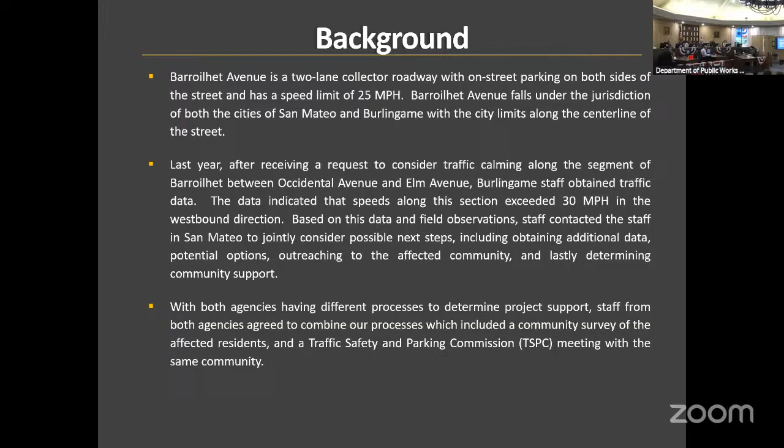And then moving along, this is El Camino Real on your right, and the border of Burlingame, San Mateo, and Hillsborough is Elm. So the section we're considering is the red section between Elm and Occidental. I'll talk a little bit more about this, why the section between Occidental and El Camino is highlighted, in the next slide.

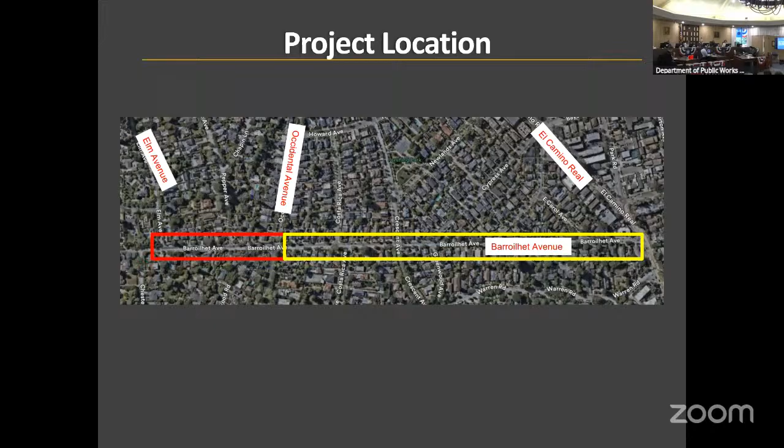Again, here's the section we are considering. Also last year, both staffs held a community meeting with the residents, and we noticed the residents on the section of Barroilhet between Elm and Occidental. However, also at that meeting were in attendance the folks east of Occidental, between Occidental and El Camino, who also showed up to that meeting. And they had expressed a desire to also have their roadway looked at for traffic calming, possibly speed cushions.

Staff at the meeting determined that speed cushions were the appropriate traffic calming element to install. We also looked at the other section of Barroilhet between Occidental and El Camino and collected data there. That data did not exceed the thresholds established by San Mateo.

So we decided to remove that section of Barroilhet between Occidental and El Camino from consideration at this time. The goal would be, if supported and we put in the speed cushions, to monitor that section of Barroilhet between Occidental and El Camino to see what happened. If speeds continue to decrease or stay the same, we're fine, but if there's an increase, we can reconsider it for speed cushions at a later time.

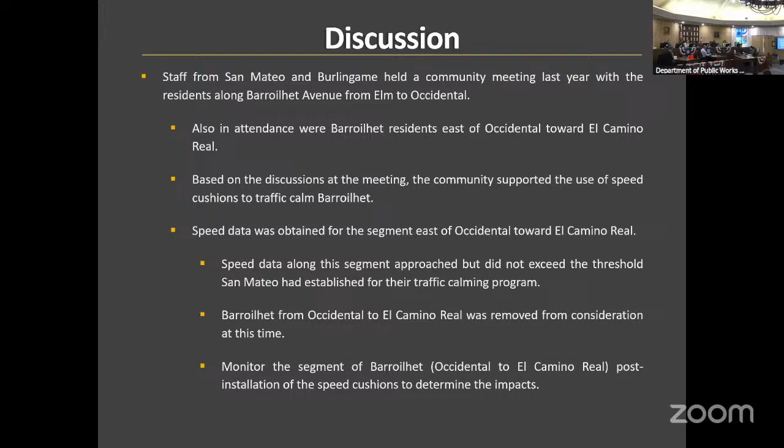Based on both the data we got and the feedback from that community meeting, San Mateo staff distributed a neighborhood survey for speed cushion installation. This survey would help us determine support for the speed cushions, outline the process used to determine whether they were supported, and let folks know the speed cushions would be located with an engineering study.

Moving on to the survey results, 17 out of 21 were returned. At least half, so 10, needed to be returned for the survey to be valid — we got 81%. For implementation, two-thirds of returned surveys needed to support it, and again we exceeded that with 82% of residents supporting it with yes.

So based on both the traffic data we acquired and the survey results, both agencies recommend we move forward with the installation of speed cushions along the section from Elm to Occidental, as well as do some post-monitoring once those speed cushions are in, to follow up and see if the other section may need improvements at a future point.

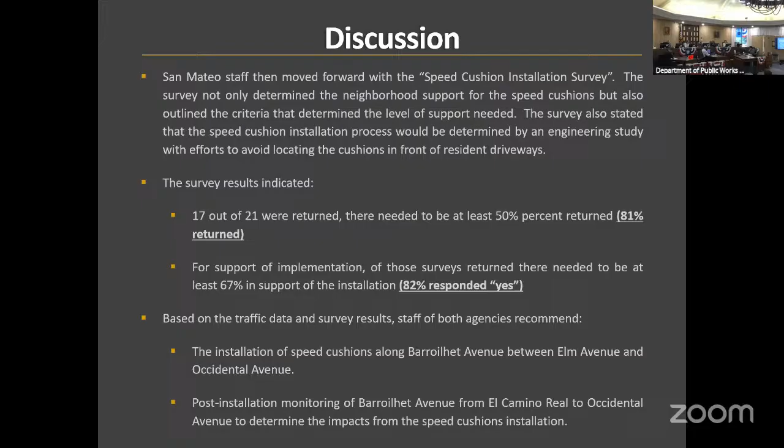So with that, I know we have some residents — hope to get your feedback as well as the community's feedback on this, and then get the support to move forward with the installation.

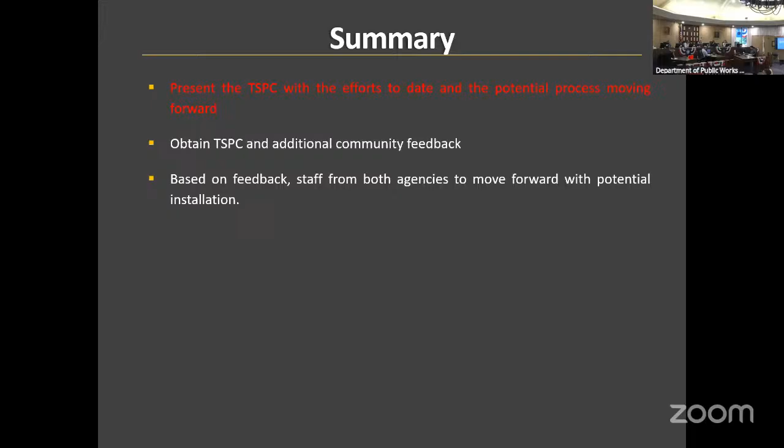So with that, I know we have folks from the Barroilhet who were part of the project, so they'd like to speak. All right, thank you, Mr. Wong.

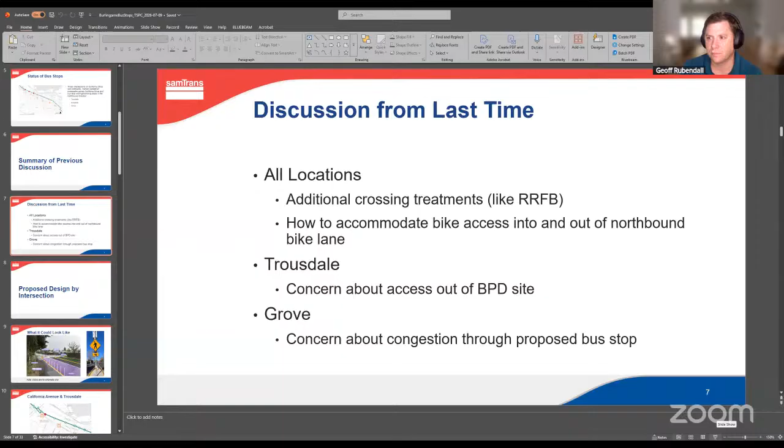Take us away. Great, I'm Nicholette Tolmie, I'm a senior planner at SamTrans, and I mostly work on bus stops. I unfortunately missed the meeting last month, but I'm here to present on our detour and bus stop designs and the changes that we've made since last month. We have a pretty quick agenda. I'll go very high level, mostly just a reminder of what we're here for and some background and context. And then Geoff will get into the details on how we responded to some of the comments from the last commission meeting.

So the purpose of tonight is we really want to get some final comments on the designs of these 3 intersections, and hopefully after this meeting have the consensus to start thinking more about implementation. We are getting as close to final in the designs as possible and would really like to hear any comments that are lingering in your minds, or if you're seeing anything, feel free to speak up about anything you might not feel super comfortable about, or anything that might come up in the future as a barrier when we're thinking about implementation.

Just a quick reminder of why we're doing this. The Caltrans project on El Camino Real is about 3 miles through the city of Burlingame. We think the construction timeline will be around 3 years. It's currently happening, and we are running this detour along San Mateo Drive and California Drive. The construction impacts the roadway all day long during weekdays. This is Samtrans's biggest and core route, ECR, which sees about 10,000 or more daily boardings. This provides a huge connection throughout the peninsula, so this is a really important project for us and all of our riders.

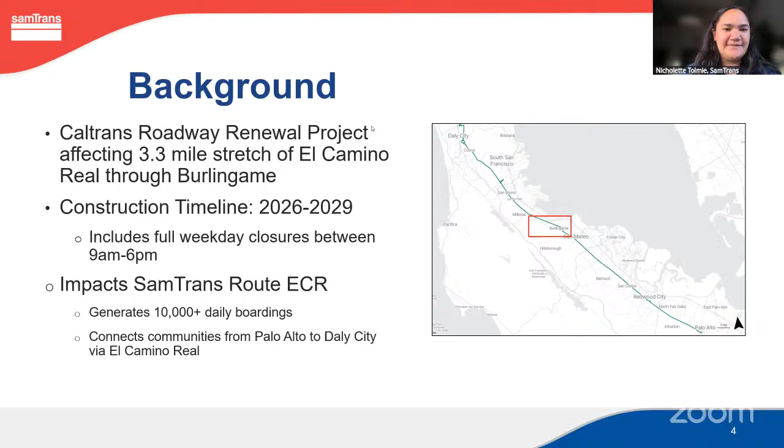Just a reminder of what we're speaking about specifically today. We have a bunch of bus stops that we're using in the detour, but there are 3 on the northern segment of California Drive that don't have an accessible sidewalk in the northbound direction. That's at California and Trousdale, Rosedale, and Grove. Geoff will get into the details of how we're designing around that issue.

The designs have been revised based on input we've received from you all, as well as additional assessments we've been doing and internal conversations with city staff and Samtrans. Just a quick summary of the high level feedback we heard was an encouragement or request to do additional crossing improvements, something like an RRFB or other crossing improvements, and to think through how bikes may or may not be able to access the northbound bike lane because of these new bus stops.

There's some concern about how and where cyclists would come into and out of that lane at these intersections. Specifically at Trousdale, there was concern about access to the police department site, as well as the left turn pocket that's there, and we're also talking about where the bus stops would be—they would both now be on the northern side of the intersection. Then at Grove, we discussed what an in-lane bus stop would do during congestion, and how that may cause issues or exacerbate the existing peak period congestion in the southbound direction. We talked about a bunch of other stuff too, which we can revisit as a group.

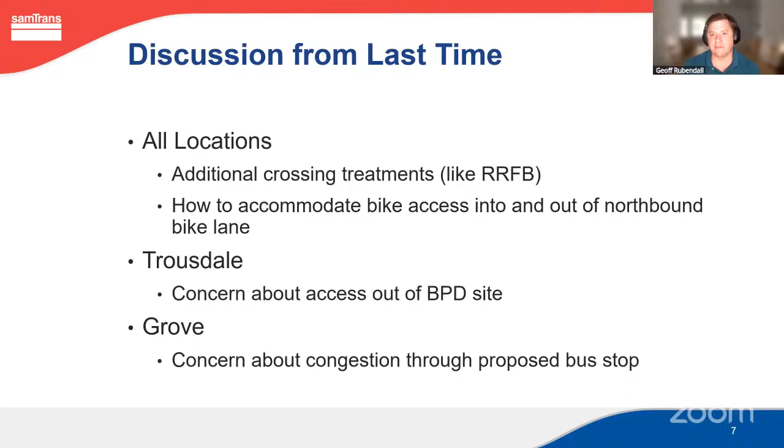We have similar slides from last time that walk through each location, but really wanted to start with the cartoon we showed last time that shows the rendering of where and how these bus stops could look, minus the purpleness—that's purely just to show the area where somebody would be waiting.

This is at Rosedale, a picture with a rendering of what that northern stop could look like. It has not been updated to include additional features such as the RRFB we're proposing at each location, shown on the right. This is an example from a different city, but it also includes a raised concrete median island in that installation, which we are also investigating and proposing here. It would not be exactly where the RRFB post would be, but before that, so it provides something in the buffer—a vertical element that someone riding their bike or driving their car would see and encounter before making contact with the post itself.

So the first location to revisit is Trousdale. This is a street view image of what's out there today. There's the existing left turn pocket that turns left onto Trousdale, and this raised triangular island. In the northbound direction, like Nicholette mentioned, there is no sidewalk, but there's a striped bike lane, as well as a striped bike lane in the southbound direction with green markings through the intersection.

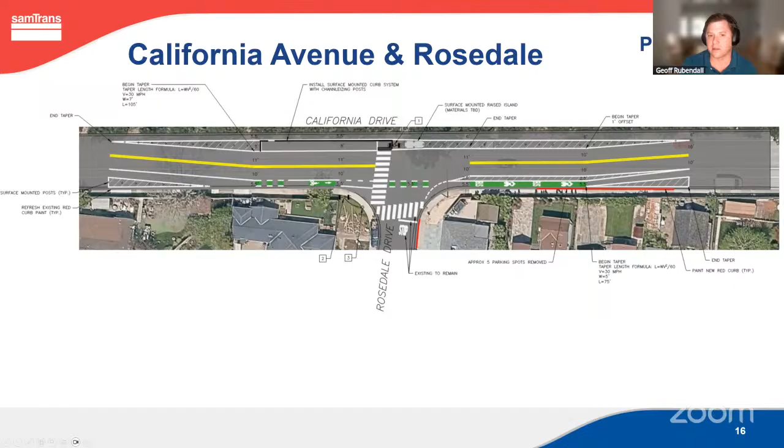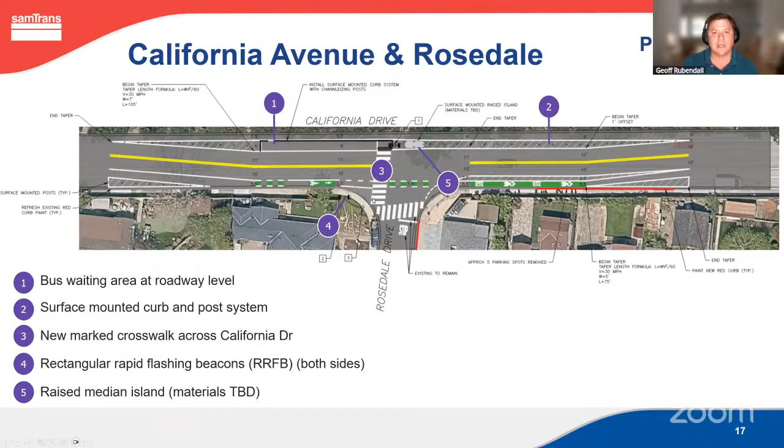These are again just highlighting some of those elements: the buffer area identified as number 2, the buffer island as well, and the crosswalks that we talked about last time.

Last one at Grove. This is where the bike facilities are no longer striped bike lanes, but shared lanes with sharrows in the roadway. I believe there are some green markings leading up to it, but not actually at the intersection.

So this is more of a constrained approach where we're retaining the southbound shared lane. We are able to stripe in a northbound 4 to 5 foot bike lane for the northbound direction. These would be in-lane stops again, and this one has a little bit more impact in terms of temporary parking loss while these stops are active.

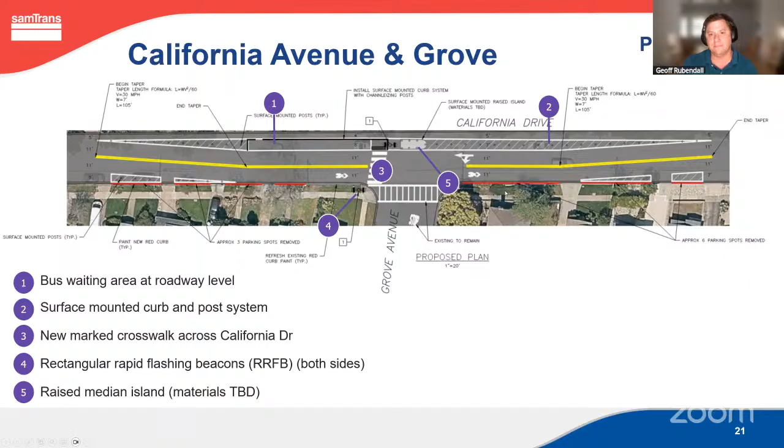But this also does include the RRFB and the buffer island that we mentioned as well. Okay, next slide—this is just identifying them again. So really that's a quick run through of the changes.

Happy to talk through any questions you all might have. We've had a conversation with Caltrans to discuss the logistics, some of the proposed materials, and configurations—still ongoing conversations. Got some children in the background, hopefully that's okay for you all. We're still hoping to have something installed by the end of summer, late summer, early fall.

One thing we didn't mention last time—except in discussion—is where there isn't a flat concrete or asphalt laydown area for people getting onto and off buses in the southbound direction, there will be some landscaping and modest paving or concrete work, so that when the bus picks up or drops off folks, people aren't standing in bushes or having to walk through bushes. There will be a flat, accessible area for folks getting onto and off the buses.

And with that, I'll pause and happy to answer any questions or clarify any points you all may have. All right, thank you very much, appreciate that. Commissioners, are there questions on this project?

Commissioner Israelit: I apologize, I missed last month's meeting, so this is the first time I'm seeing it, but if I can just step back one step.

So we are taking away parking for short stretches of space so that we can utilize this landing zone for the bus stop, correct? Yes. Okay. And we don't have to warrant, we don't have to have community meetings prior to removing that parking? I'm sorry if this was already discussed, but I know when we do curb stuff, it's oftentimes a big community input meeting.

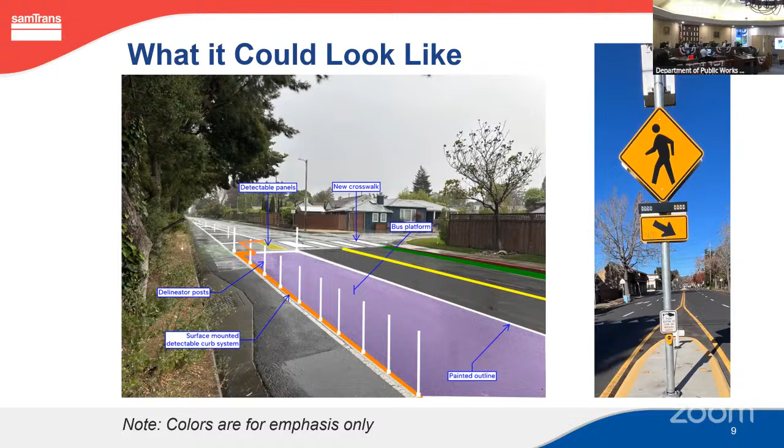Other questions? Yeah, maybe I missed the meeting too, so I have a couple questions. Are all of these planned for just northbound bus stops, or are they north and southbound? I'm just trying to figure out how it plays out.

Thank you for asking, happy to go through this. In the southbound direction, there is a proposed bus stop at all three locations. Because there's a sidewalk, the bus would come to the curb and use the existing sidewalk to pick up and drop off passengers. In the northbound direction at these three, there is no sidewalk, so we're proposing this bus waiting area in the street. So there's a bus stop proposed for both directions at all three intersections, but the configuration differs because there's sidewalk on the city side and no sidewalk on the rail side.

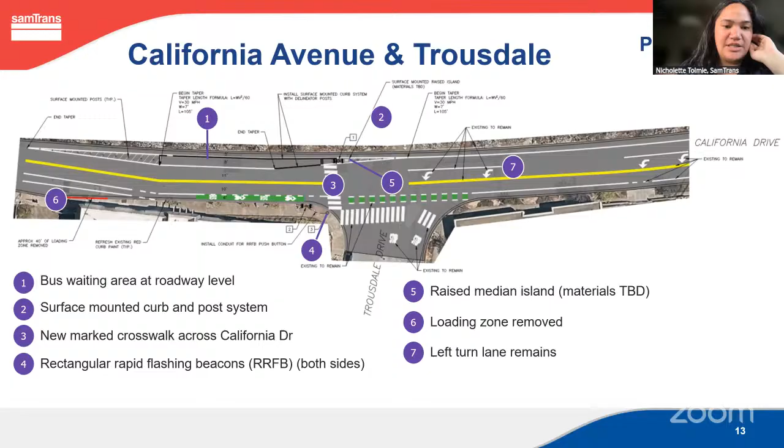Just to add, currently we're able to serve the southbound direction bus stops. Right now, people wanting to get off at these three intersections in the northbound direction are being directed to go all the way to Millbrae Transit Center, transfer to a southbound ECR bus, and then get off at one of the southbound stops at these intersections.

Understood. Okay, I have a much better picture now of what you guys are proposing here, so thank you.

Okay, Vice Chair Johnson? Just two things, and one is for Mr. Wong. On the parking, have the residents in that area been notified that this plan is coming, or what is our responsibility there?

Through chair, we haven't noticed them yet because we weren't sure what the extents were. We can start to let them know once we get support for this, and then move to the next step and send out notices and walk them through. Okay, and not 24 hours before it happens.

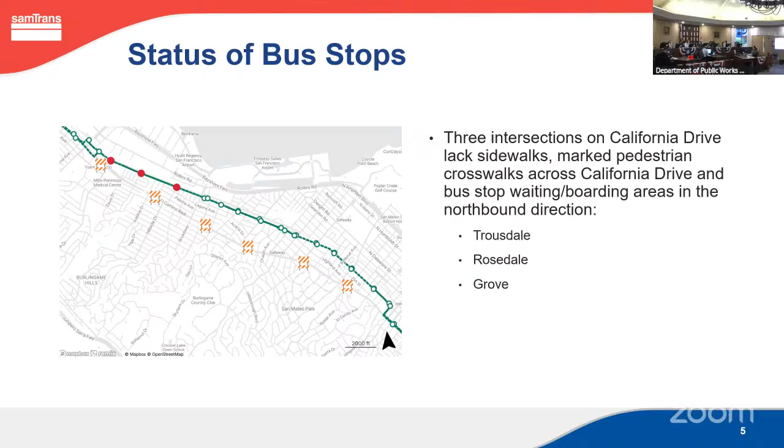Other question I had, the other question that came up last time was around Burlingame Police Department, and I'm assuming their concerns have been addressed in this new proposal. Through Chair, previously the bus stop was relocated to the north side of Trousdale, so that allowed us to keep the northbound left turn lane. Some of the other concerns they expressed aren't generated by this project, but are generated by the El Camino Real renewal project and the amount of traffic going down. That's something we only have a couple streets to detour onto, so that's something we'll all have to work with. Okay, great, thank you.

Commissioner French? Yeah, I just wanted to mention two things. So thank you for the proposal, the revised proposal. I think you've made it very clear for me to quickly remember what we discussed and what you've changed, and that's really helpful for us to make a quick decision. So appreciate you listening and taking our input.

And then just for Commissioner Israelit, it was me who actually gave the feedback about the bottom of Broadway and El Camino, when they first put up those temporary white sticks, they were being knocked down like all the first morning, and they were so flimsy. I proposed the feedback that we needed something more durable if it was going to be for 3 to 4 years. So that was the reason behind it. Got it, okay. That's all. All right, thank you.

I did have a question about the buses stopping. Is it a painted bus stop there in that green section where the bike lane is as well? Sure, yeah. It's a shared bus bike space, consistent with SamTrans's own design guidelines related to treating bike lanes through bus stops. Okay, I just want to make sure the bikers understand that there could be a bus parked there. Yeah, okay, I do see bus written there. Okay, so that's good, that was the only question I had.

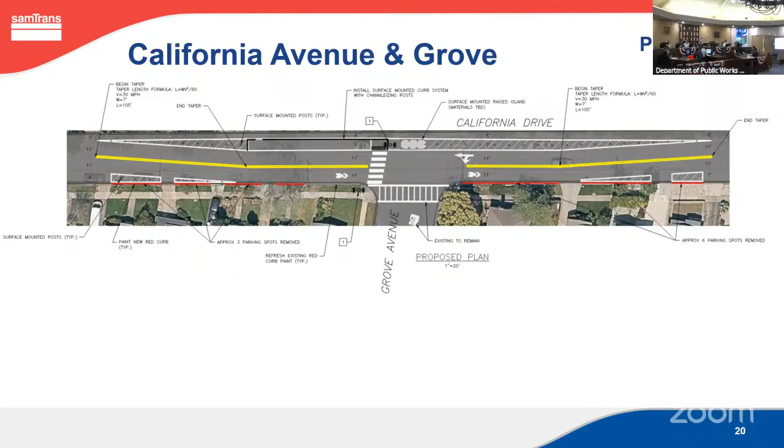If you can go back to that Trousdale side, I want to point out one other item. For the bicyclists, you can see through the intersection it's hatched. That's the conflict area that you're aware of. If you look at the bus stop, it also has that, indicating to bicyclists to pay attention, that this is a facility that's going to be crossed.

It says 'bus' in there too, and I think that's a big indicator, and that's what I'm looking for. Last comment - did we talk about having a flashing light that would indicate when the bus is going into the bike lane? Did we discuss that last week?

No. Because I wouldn't see that until I'm on it on the bike. You know how you have temporary arrows that light up when the road's narrowing, for example on El Camino? Could we have something that flashes to say like 'bus, bike lane, caution'? I'm just thinking out loud.

If I were biking - I would imagine, through the chair, the buses typically will signal as they're going over if they have to, and potentially depending on the drivers, they may pause and let the bicycles pass. But yeah, that would be something that's not used. I haven't seen anything like that - how would you activate it?

Well, I've talked about this before. When you're cycling in other places, there's an etiquette where all the bikes are allowed to sit at the top of the row, and that doesn't happen in Burlingame. So I'm wondering if we could look at painting it so the bikes get to sit at the very top - see where the number 2 is, at the top of that green line - so then the buses can come up behind them.

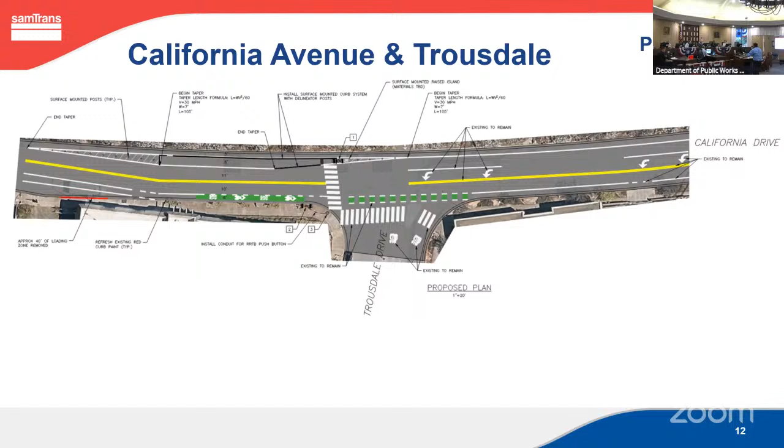I just meant prior to the bus stop, having a sign that alerts cyclists that the space coming up is shared with the bus, that a bus might be pulling over. Not whether people are turning, just a heads up, since they might not be familiar with it. It's not really different than any bus pullout that's going to pull over and block the shoulder, right? But they don't pull over in a bike lane, do they?

If the bike lane is next to the curb, then they absolutely do. I'm not a big cyclist myself, not like in Europe where bikes are more common.

Thank you for the questions and comments. Any other comments? No? Okay, Mr. Wong, you want a motion, right?

Through chair, did you do public comment just to check? Good question, just in case I see one individual, not on the agenda. Mr. Wu, is there any public comment? No emails, nothing? Oh, I'm sorry, I apologize, yeah we do have one person in the audience. Got wrapped up here. Okay, very good.

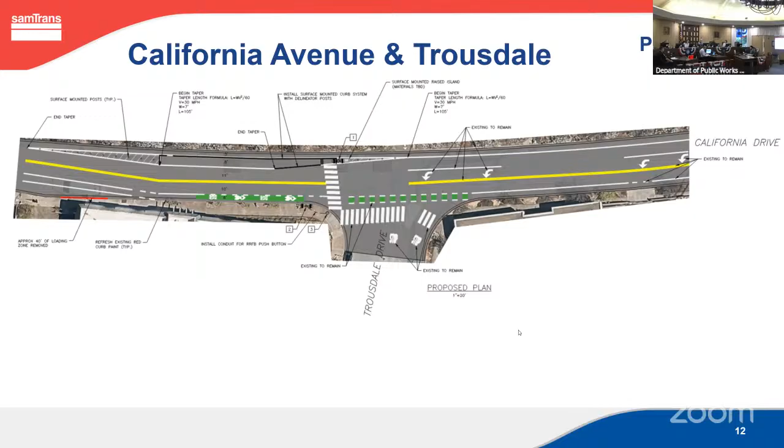So then we'll move on to a motion. Is there a motion from the floor? Anybody want to make a motion? Motion to approve. Okay, motion by Commissioner French to approve the project. Is there a second? I seconded. Motion to approve by Commissioner French, seconded by Commissioner Israelit.

Mr. Wu, could we have a roll call vote please? Commissioner French, Aye. Commissioner Brown, Aye. Commissioner Israelit, Aye. Vice Chair Johnson, Aye. And Chair Martos, Aye. Okay, the motion carries 5-0.

Oh, also another well-written report. Mr. Long, I appreciate it. What's going on? We all appreciate it. Thank you, Chair Martos. I think it was because it was such a long conversation last time, if I recall. We spent a lot of time on this one. Yes we did. All right.

Thank you, Chair Martos. Again, we're revisiting, just giving you another look at the South Rollins Streetscape Traffic Calming update. As we talked about last time, with Vision Zero, Rollins Road was identified as part of the high injury network. That was part of the Vision Zero effort. We acquired $440,000 to do improvements from the Measure A and Measure W funds to address the issues.

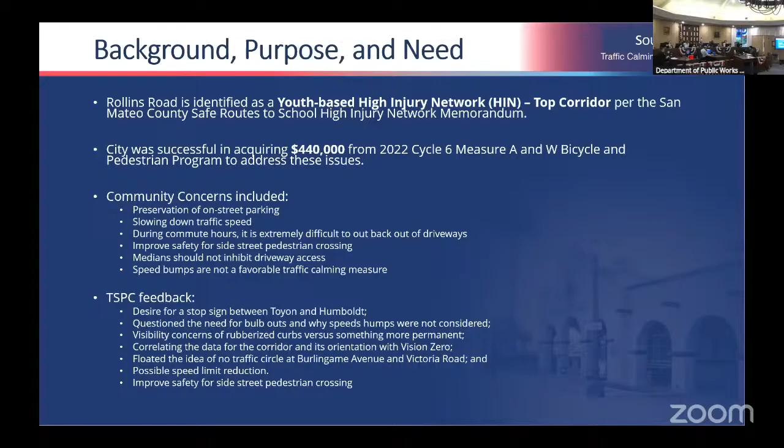At that meeting and also at the community meeting we had regarding this project, a number of community concerns came up: preservation of on-street parking, slowing down speed, as well as commission feedback regarding potential stop signs and wondering why bulb-outs were used instead. I'll go over these concerns and the feedback you provided in detail later in the presentation, but wanted to get you into it and remind you of the project. Again, we're calling this the South Rollins project, so it's south of Broadway all the way to the city limits at Humboldt.

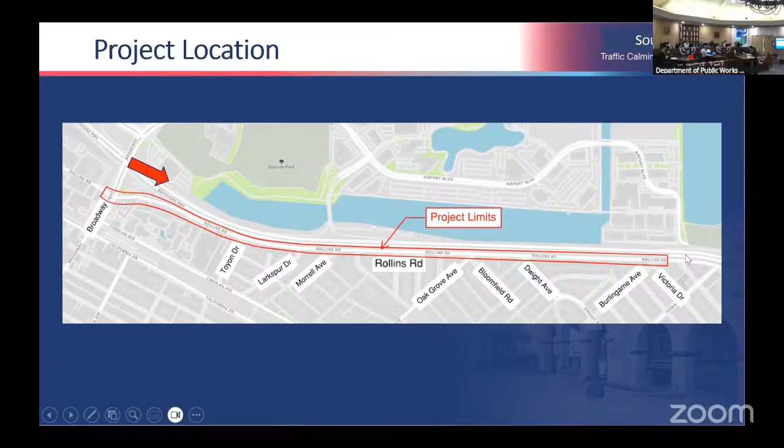It gives them a little bit more clear space, just like AB 413 provides, but this does it and pushes the vehicles out a little bit. So these are the quick build traffic calming treatments being done along the corridor.

Just wanted you to get an idea of what you're looking at. So we're starting at the northern section. Broadway is to your left, and then moving left to right, you have Rollins Road. We're merely enhancing what's out there now.

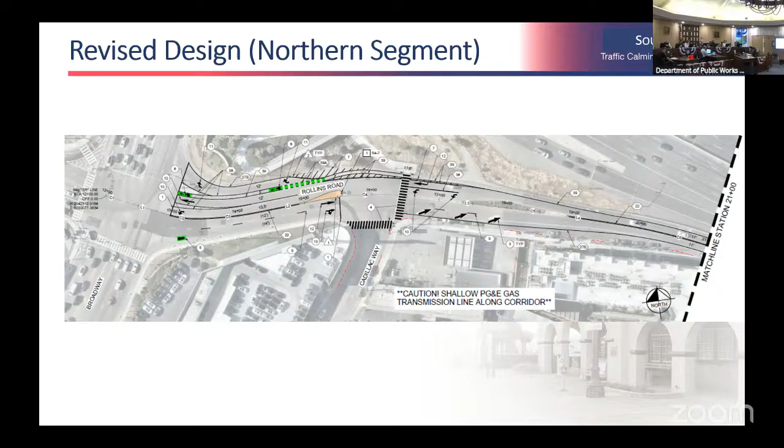There is a bike facility, but we're adding the green backing to it to highlight it more, as well as the brown bulb out to that lane line, just to force vehicles to come in there rather than have this big open space when they cross Cadillac.

So as I indicated, hopefully it's simplified. A are the medians, just showing you the location. So we're moving south of Broadway now, and there's 3 of them installed along there. These are the median, temporary quick build median islands you saw in that earlier slide.

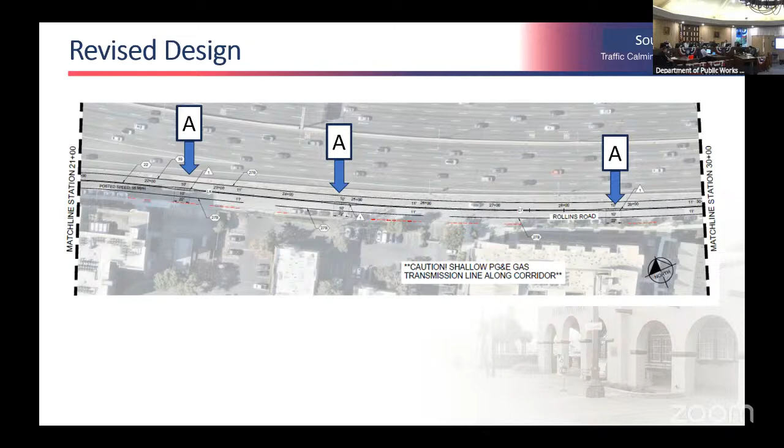Sorry, I go quick, I was trying to simplify it. The little caterpillar things? No, sorry. I try to give the A's. This is what A is. B, A will be that, and you'll see as we move down, you'll see a combination. Oh, because they're listed as 1 on here versus A. That's why I got confused.

Oh, don't worry about those. Are from the design. Oh wait, I'm okay, sorry. I should have pointed out next to the photo. These are the call outs that will, okay, simplifying it.

Just making sure that we address your feedback. This is one of the intersections you indicated that maybe we can roll back and not do a bulb out here and some of these treatments because it's an all-way stop. We discussed this with the designer, and the reasoning is trying to keep the corridor consistent with these improvements, since every intersection down the corridor looks like this.

It has the bulb out, it has the hardened center line, it has that. But we understood that this is an all-way stop, which is a little different than the others, so they're flexible on some of it. However, they would like to make sure that the hardened center line and the island remain to address that particular issue.

This is the corner where 7-Eleven is. Correct, right here in the bottom right-hand corner. When you say ABC, all 3 of these treatments, A, B, and C are being... Can you go back one more time?

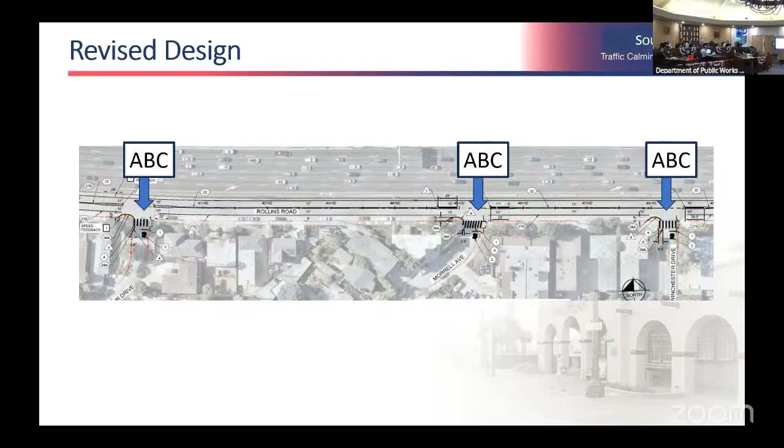Again, West Winchester, Corbett, Francisco — same treatments.

At Marin and Oak Grove, we have our first and only traffic circle at this intersection. It's also all-way stop controlled. The island itself in the center, the curb isn't a 6-inch curb, it's a mountable curb. So it actually widens up the road, but if you go over it, you'll feel no different than the roundabout.

That's in there on California Drive. See a puzzled face. The oval shape makes it really odd for a southbound car, it's really quite like a little hairpin turn. And it'll further emphasize that it's all-way stop control now, so they'll have to stop and then proceed through it. They're no longer traveling at speed.

It's hard to see, these little markings are all-way stop signs. There's no crosswalks there because there's really nowhere to go, no point for people crossing. Can you point out the stop signs again? These little black marks, all the way around. It's just weird, it looks strange.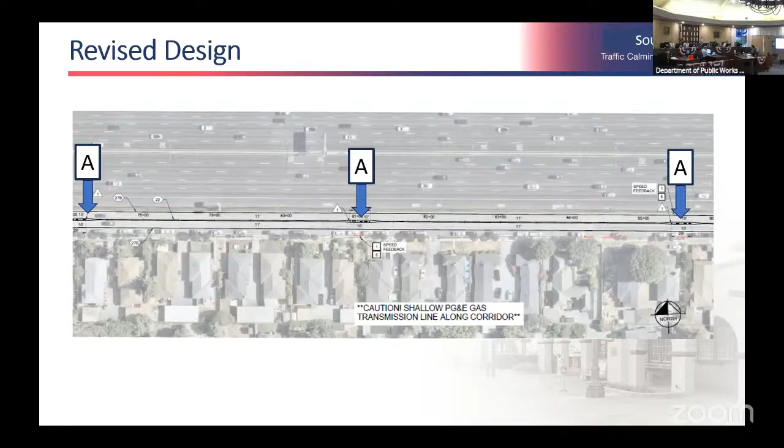Again, moving down the corridor, just median island. And then we get to Victoria, Burlingame Avenue. Again, we've enhanced what's there, but left it pretty much the way it is.

So with that, like I said, we'd get back to those community concerns and the feedback you provided. Preservation of on-street parking: about 5 on-street parking spaces are removed as part of this project, but many of those are close to the intersection, so they would be removed anyway for AB 413. We tried our best to preserve as much as we could.

Slowing down traffic speeds: the entire project is a traffic calming project, so the goal is to reduce speeds along the corridor. During commute hours, it's extremely difficult to back out of our driveways. While there's not a single improvement aimed at that one, the combination of the all-way stop sign will make a break in the traffic for some folks, as well as slowing down the corridor, will make it better than it is now.

Improved safety for side street pedestrian crossing: we now have the bulb-outs and the median islands to reduce cars turning fast, and we have marked crosswalks there now. Median should not inhibit driveway access.

Efforts were put forth in the design not to do that. And speed bumps are not a favorable traffic calming measure. We might agree with that on this one. However, it's also an arterial. We're not putting speed cushions on an arterial because of emergency response times.

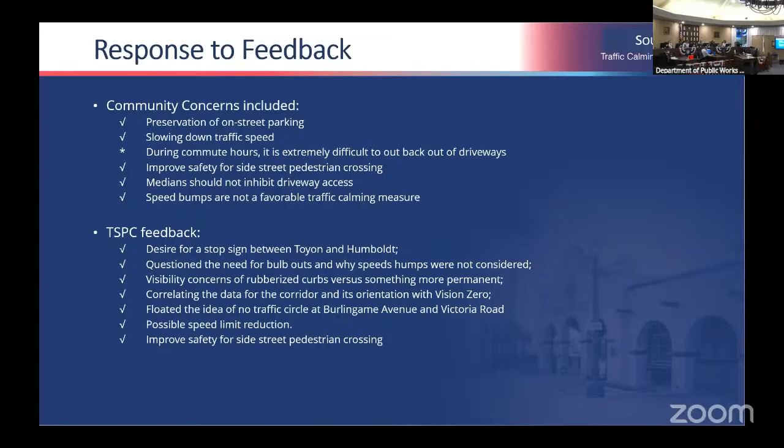So with that, we brought this back to you because this project has been awarded by City Council. They made a request to bring it back to the commission just so you guys, if you had any additional feedback, but to confirm your previous comments had been addressed. We can take some minor comments if you have any additional ones, but we're going to start construction anytime now because it's been awarded and we're just waiting for our project manager, Mr. Yang, to return from vacation. He'll get it started. So with that, we'll take any questions and listen to any feedback.

All right, thank you, Mr. Wong. Sorry, Commissioner Israelit. It's okay. Well, I missed... You don't need to be sorry. Always appreciate your questions and comments.

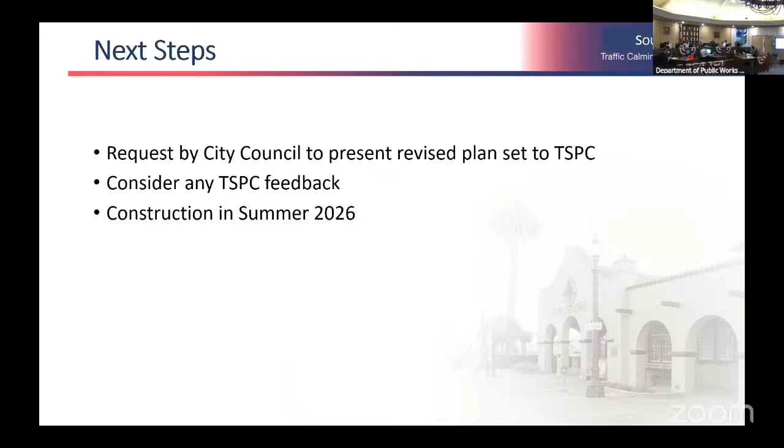So, okay, I don't really understand why we need to have those B things because the A things are pretty gargantuan. Is it just to create a taper? You can't have the A things taper themselves. I just think it would be nice to have one uniform piece.

So that taper allows us to extend beyond the crosswalk, because if you look here, we couldn't put this into the crosswalk that's here. So just to further keep folks from entering the crosswalk and not impact pedestrians crossing, that's what that little bit's for. What will happen is A will be back here—you can see my cursor—and that leaves folks still able to roll over the crosswalk and cut the crosswalk. So this just adds a little something more that's not too intrusive.

I don't question the need for it. I'm just surprised they don't make something ship-shaped, or all of one piece, instead of one piece of rectangle and then the other one. Yeah, I think that's what she meant—I want something sleek, but I was just curious. They may not make that, it may not work. I just wanted to ask.

I really like that you're making each street the same, because as I drive down that street to go to Victoria Park once a week, it's really hard to tell where the streets are. You see a driveway and you can't tell when it's a street.

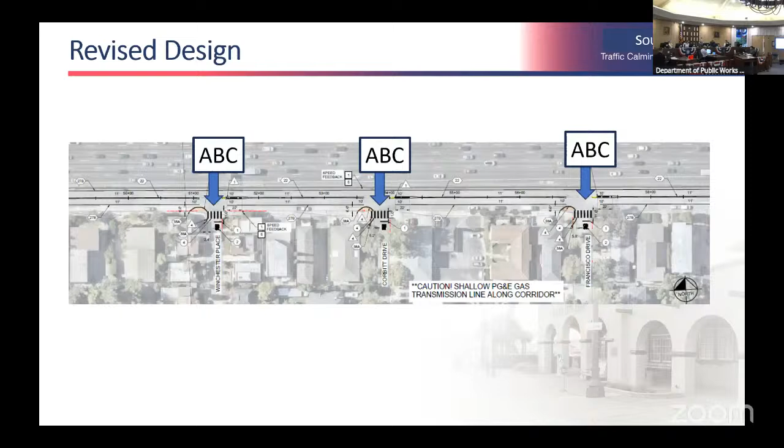And the last question, I don't know if you discussed the rotary when I wasn't here, but do you really need stop signs at the feeder streets to the rotary, if you're going 10 miles an hour through it? Is it because it's so close together that you kind of need the stop signs to avoid accidents with yielding? Yeah, I think that's more of it.

The stop signs at that point aren't moot, because they're a traffic control device, not a speed device, but it's moot because you're going so slow anyway. When you get there, you're trying to figure out who gets to go when, because they're very close together. Okay, thank you, that's my question.

On Toyon Drive, which one is the new stop sign? Are they all new? At Toyon right now, this is an existing all-way stop. The only new one is at Oak Grove. Oh, at Oak Grove, okay, thank you, I got confused.

All right, Commissioner Brown, yeah. So this is great, by the way. Yeah, I drive this road every day, and I walk the dog along here almost every day.

So in this new roundabout at Oak Grove and Bloomfield, is it landscaped at all? Because there's one on Morrell, if you come off of Rollins Road and turn left, I believe it's Morrell, it goes through the neighborhood at Larkspur and Linden, which makes it a little more neighborhoody, versus just being a big thing in the middle of the road. That was my one question. If that could happen, that would be great, because it would give some real character.

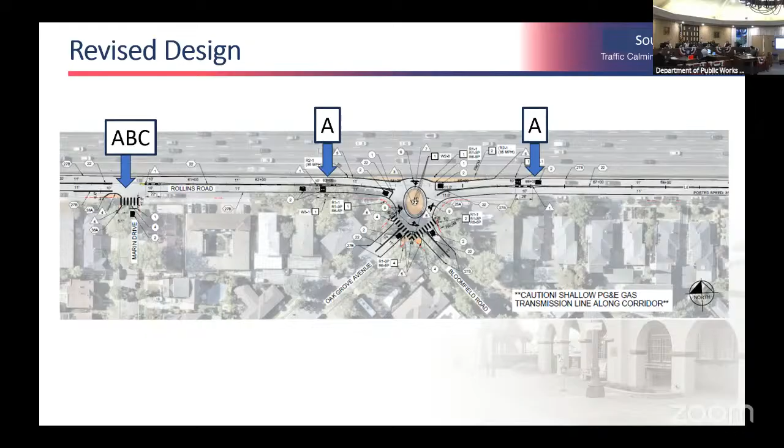My only other thing is we only added one all-way stop. I'm still concerned about northbound traffic coming around the corner of Humboldt, that first entrance onto Rollins Road in Burlingame, because it's blind coming around the corner on Humboldt. You can see where Humboldt angles into the road, and coming down that corner, it's blind on the right-hand side where there's a building. So it'd be great if there was a stop there.

You did say that Oak Grove was the middle between Toyon and Humboldt. Humboldt might be considered for at least something to start slowing that traffic flow as we're going northbound. And those would be my only questions.

Through the chair: we can see what's left, and we could also look at landscaping in the center as a future project. This one at Humboldt, maybe it's just my luck today, but that's another jurisdictional issue, we share that with San Mateo, but we'll bring it up at a future meeting to discuss if there's something we can do. Yeah, good point, it is blind, it's very difficult out there.

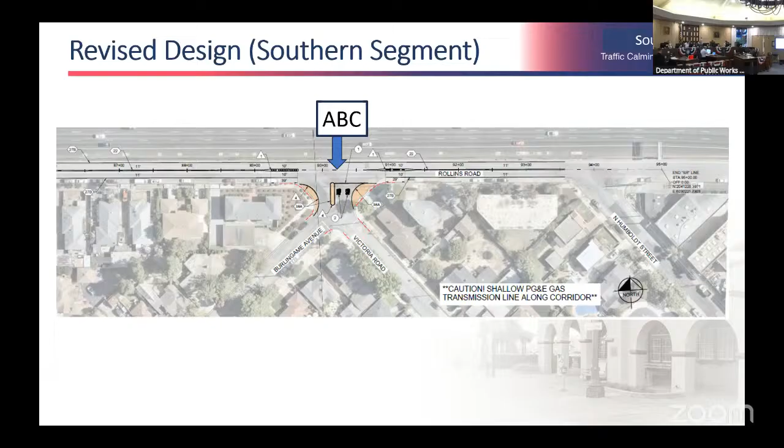Okay, I like the design, Mr. Wong. I would just poke a little more at what Commissioner Israel had said about the B item. It's not really used in a crosswalk—I mean the example you showed is used in a crosswalk, but where we have the B items, there's no crosswalk there. So can't we just extend the A item to the length of A plus B?

We can discuss it with them, yeah, we'll discuss with the team. Looks so much better. I think it would even be more effective, yeah, there wouldn't be little corners to catch leaves and stuff. Oh, like, don't they make a torpedo-shaped one?

All right, so public comment?

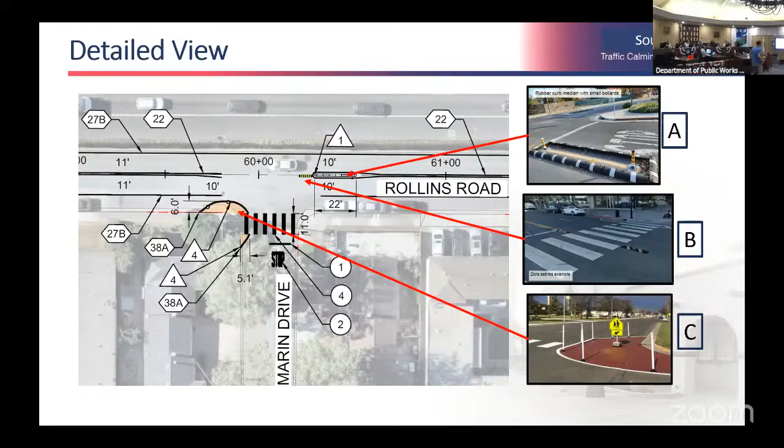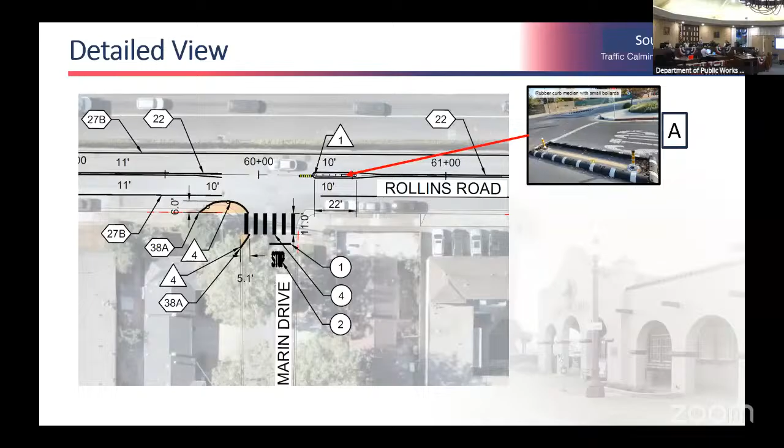Through the chair, one clarification before the motion is made. As far as the bulb out here, if you keep this as is, including the motion, if you accept everything as is or any changes—we just want to note this one because this is one you had commented on that we had put back in. So everybody good with that?